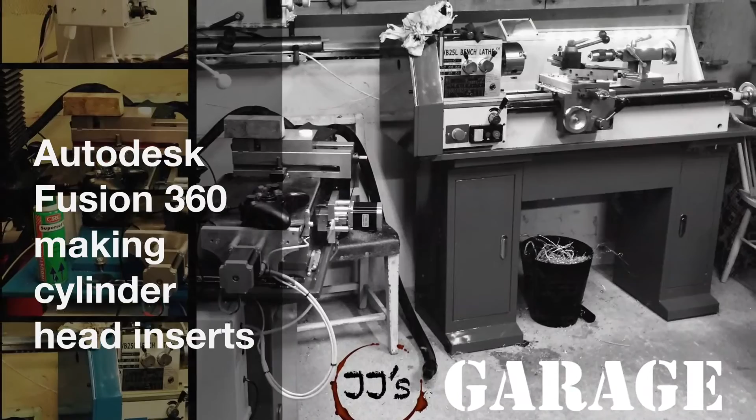I've been messing around with Fusion 360 for a couple of days and I found out a really nice thing, a good feature that I want to show you. When I tune my engines, I make new cylinder head inserts, and when you do that, I have always used my lathe to do this work before, and it's a little bit tricky to find the right volume. You have to measure, you have to try, and you have to remake it, and it's a little bit of a struggle to make them for me.

So I'm going to show you a really nice feature here. And I'm also going to talk a bit about other things here that are important. For you that already know about 3D software, I'm going to use a command called revolve to make this later on. So the rest of you, stay tuned. I'm coming to the good stuff in the end.

First of all, I actually measured the piston crown. It's a little bit rough, I know, but that is the best thing I know. And when I measure it from the outer part of the piston to the piston crown, the height is about 2.7 millimeters. So I'm going to set up a sketch point here, 2.7 millimeters from the top. I'm going to dimension it with D. That to that one should be 2.7 millimeters. Okay, now I have my point here.

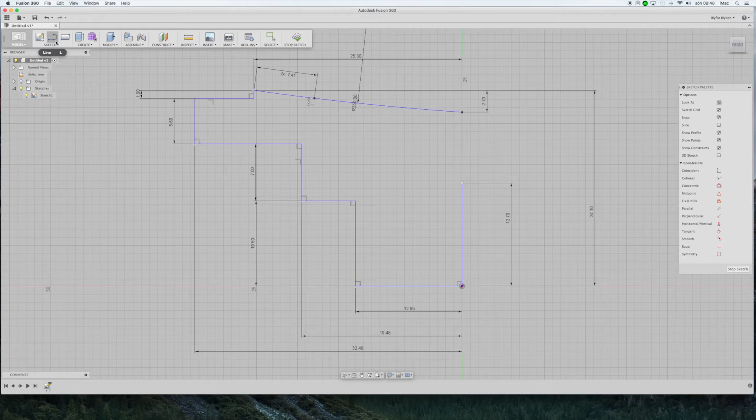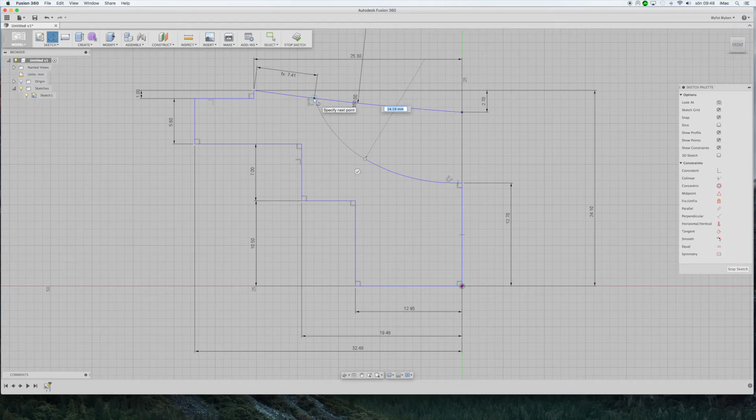What more? I need to have a volume here, so usually I just take the line command, and this is also a fine thing with this software: you can click and make a small straight, and when I click and hold down the mouse button I can curve like this. Usually I do it again, and you see then I get something that I can move on. So in this case I can change it like this, and this is good when you're trying to calculate different kinds of volumes. Let's say we should have about 10 cubic centimeters of volume here. I just roughly tune it in. I don't know if this is going to be it, but we test it like this.

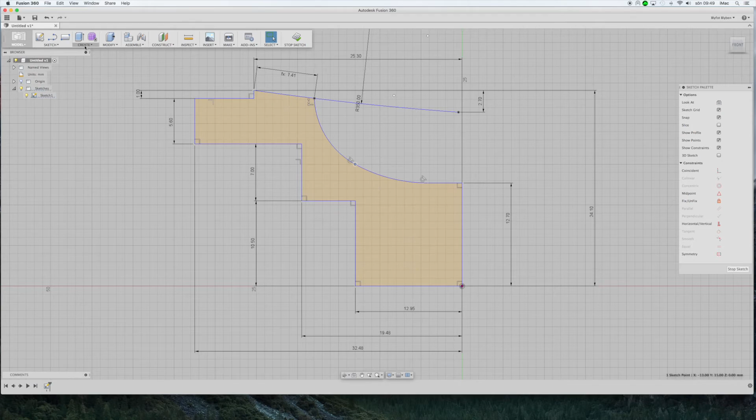Okay, now I'm going to use the revolve command. So create, revolve. I choose this model. The axis is what kind of axis I want to rotate it around, and it's this axis. And as you see now, it immediately puts up 360 degrees here. You can choose full if you want to, it's the same.

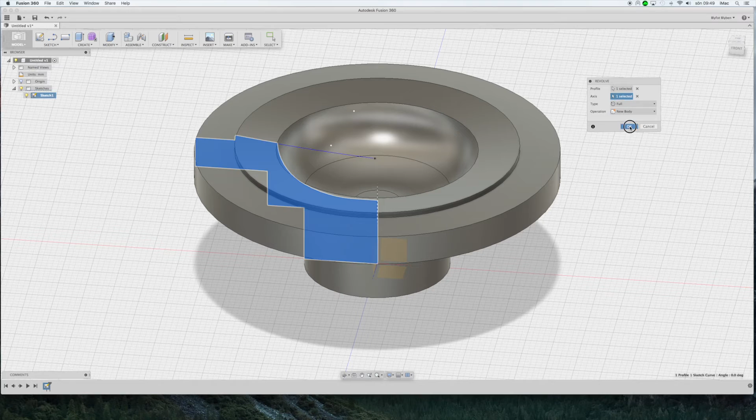Click OK, and now I have my head insert, as you see. If you've seen my movies before, you can recognize the shape. Okay, so this is of course looking good, but what about if you want to know the volume in here? Because this is the really important thing if you want to calculate the compression ratio.

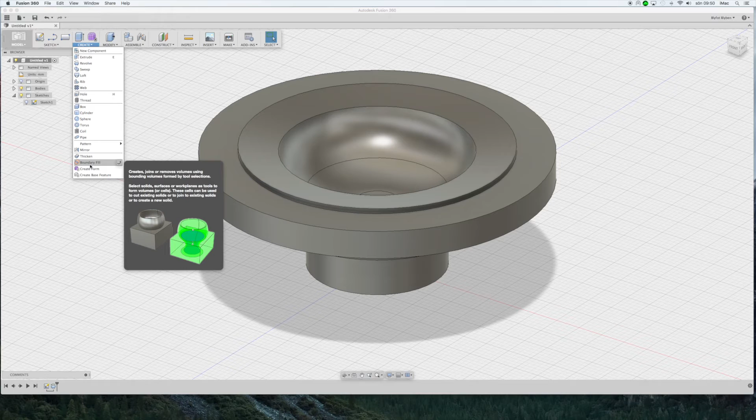So what do I do? This is the final command. Down here, you have a command called boundary fill. With this you can fill volumes to find out what volume it is when you have odd shapes. And what I do first is to make a construction plane here. So I pick this face and I pull it up. Sorry. Pull it up 1 millimeter, because I know it was 1 millimeter height on this surface here.

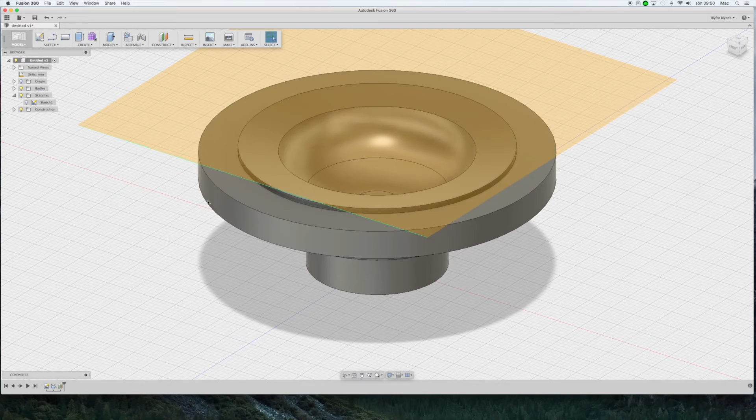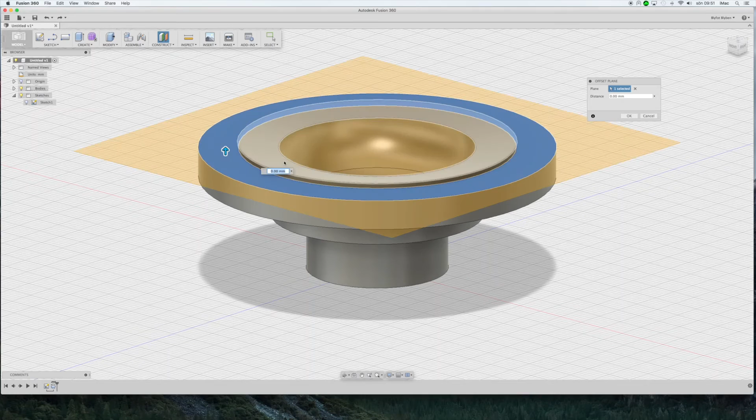So now if we look from the side, oh sorry, it doesn't. I have to redo it, I think. Construct, offset plane, 1 millimeter. Now we show it. So if we look at it from the side here, you can see that the plane is like resting on the top here.

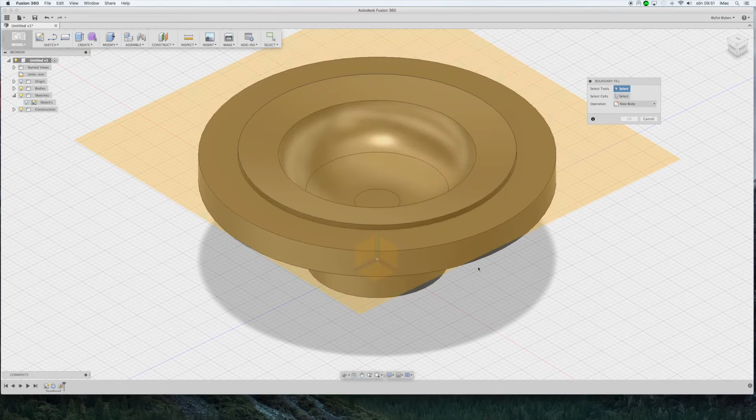And now you can use this plane as a way to use this boundary fill command. So I take create, boundary fill. I click the surface and the model, and then I get like this. As you see here, I can select the cells. I select the upper part here. It's going to be just filling out the inner part. Select it and click OK.

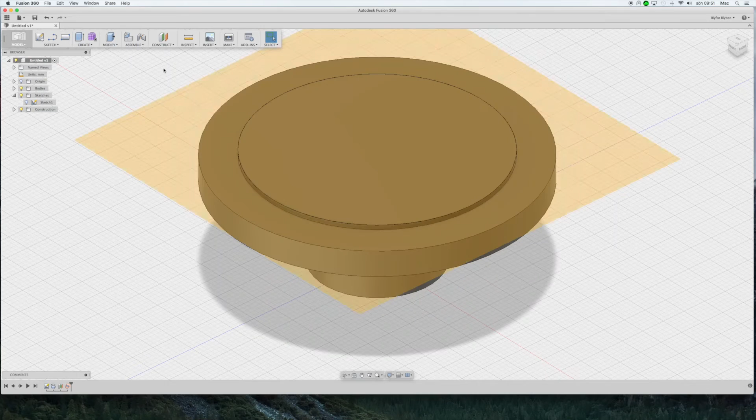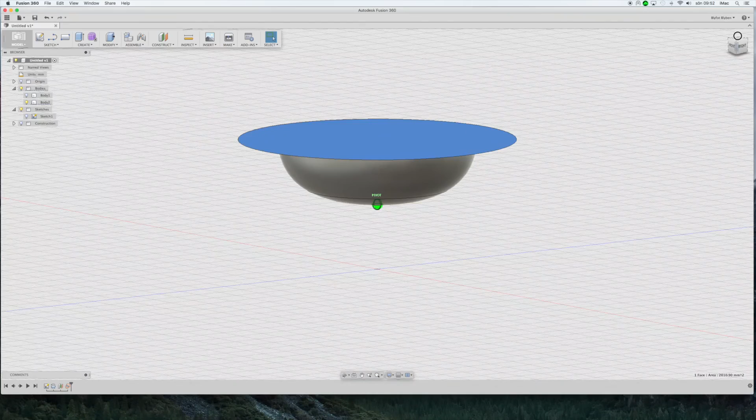And now I can turn off this construction plane like so. As you see now, I have a volume in here. If we look at the bodies here, you can take away the outer part. So you can see that I have the volume of the head insert here. And this is really good because I can just right click and use properties, and I can see that the volume is 9.2 cubic centimeters.

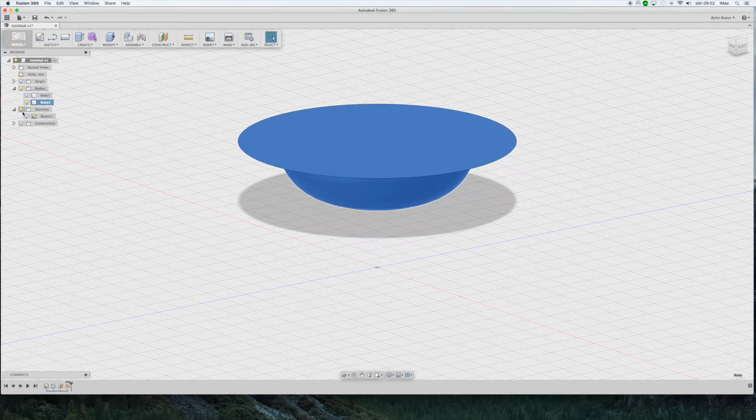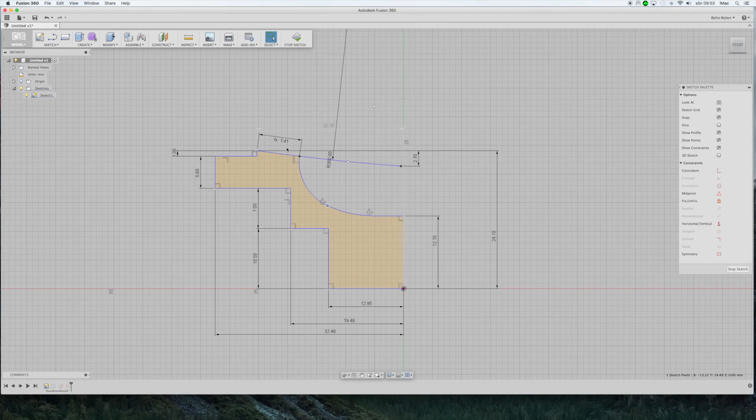And if I aim for 10, I can just go back to the sketch I used from the beginning. Okay, I have to find it. It's a problem when I use this radius. So now I can just drag this a little bit, like this, and try to find out if this is good. Okay, I stop sketch, and now the body is already updated. So I right click the body again, properties, 9.7. So in this way you can actually model up the insert in the way you want it.

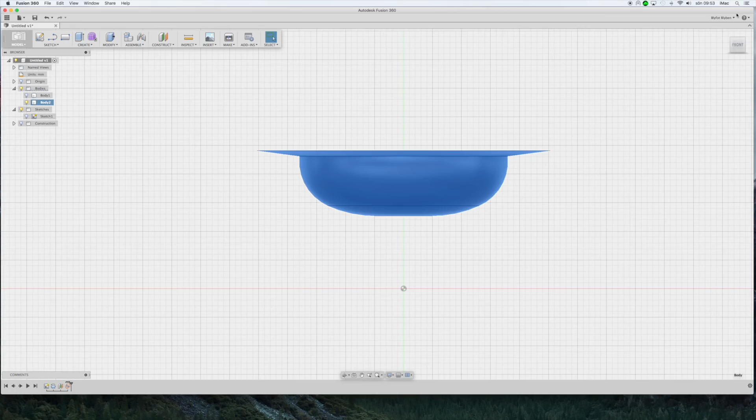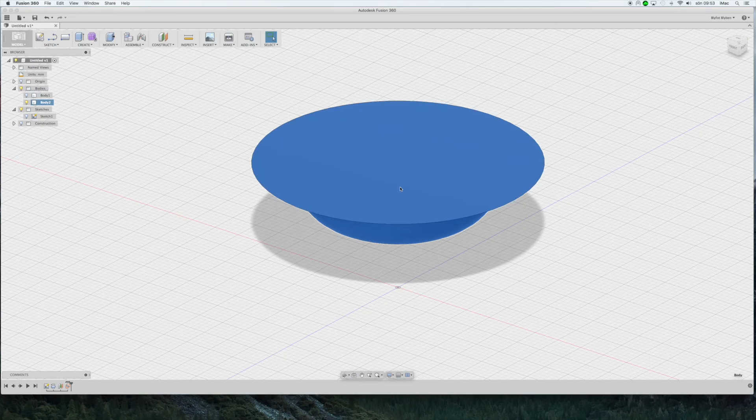And the perfect thing about this later on is when you have a CNC mill, as I have, I'm going to use this way instead to make the inserts. I'm going to use the CAM part in Fusion 360. I'm going to model up and make the G-code for a 3D program to make this insert instead. So that was the feature I wanted to show you.

I'm pretty new on Fusion 360. At work I've been using Autodesk Inventor for many years, so I'm kind of used to 3D modeling, but there's some struggle between Inventor and 360 in that shortcuts aren't the same, and this new joint they have put into the assembly part, where you join components and constrain them to each other, is totally different from Inventor. So I struggle a lot with that. But anyway, I'm used to the software itself, and it's perfect with the CAM part inside.

The only disadvantage for me is that my garage PC has to use Windows 32-bit, just because I use the parallel port to communicate with the CNC machine. So I think I have to think about different ways of controlling the CNC machine in the future, because this program is really good. It's perfect for me as a hobbyist. It's free, and it's really great. So thank you Autodesk for making this awesome software available for me.